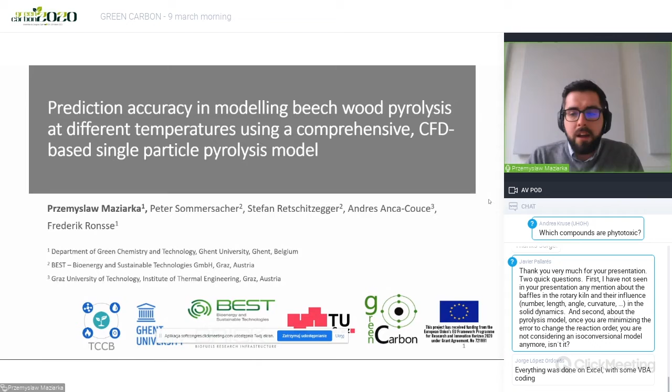The topic of my presentation is prediction accuracy in modeling beechwood pyrolysis at different temperatures using a comprehensive CFD-based single particle pyrolysis model. It's quite a lengthy title. So yeah, let's go to the details of it.

First, maybe I will highlight my role in the GreenCarbon project. My role in the project was development of a comprehensive pyrolysis carbonization model to predict the properties of co-produced biomass-derived carbon and bio-oil, where it's located within the GreenCarbon project framework, just in the middle, in optimizing process conditions to produce tailor-made biochars and linking biochars with the feedstock properties.

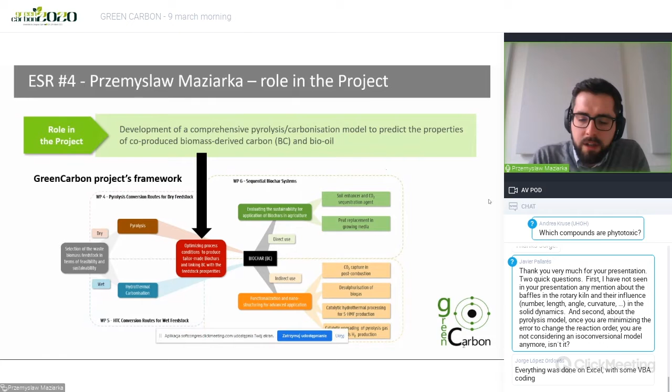Let's go back to the subject of the presentation. We all know that biochars can be applied in a variety of novel solutions, like in agriculture, chemistry, electronics, in batteries, supercapacitors. There is some research on those applications, but the question is why we don't use biochar on a large scale in those applications yet. It seems relatively simple to produce. We start from the biomass, we pyrolyze it at a certain temperature, and we obtain the biochar.

Yes, but the problem here is that those biochars do not have tailor-made properties, so they are not made specifically for each application. The properties of the biochar are sometimes completely random. That hinders their application on a larger scale in those novel applications. Where are the problems located with the production? The first is the inhomogeneity of the initial factors, so inhomogeneity of the biomass. The biomass has strong deviation in its properties, and also we don't know all about the process that happens during the production.

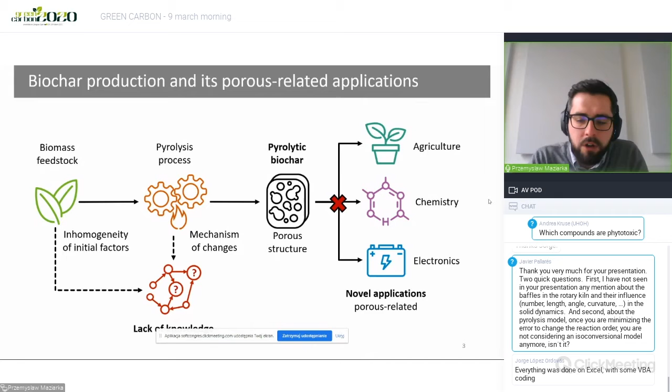From the chemical point of view, so in the reaction kinetics, maybe we know a lot, but in the case of the production of the material, there are some other properties that need to be taken into account as well. And changes, especially changes in the porous structure, are not known yet. So we have some lack of knowledge, which really hinders us from production of tailor-made biochars.

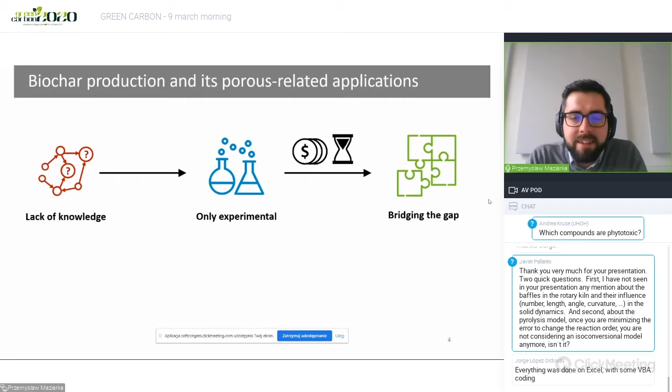Since we have a lack of knowledge, the very intuitive way is to conduct the research and bridge the gap. But the problem here can be that this only experimental way can be quite expensive. It requires a lot of manpower and it's time consuming. But there is also an option to couple the experimental work with the modeling work in order, in theory, to reduce the time and reduce the cost to bridge the gap. And coupling the experimental and modeling work is more or less the subject of this presentation.

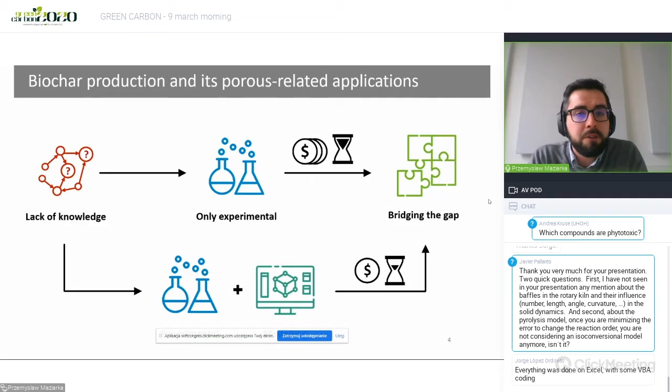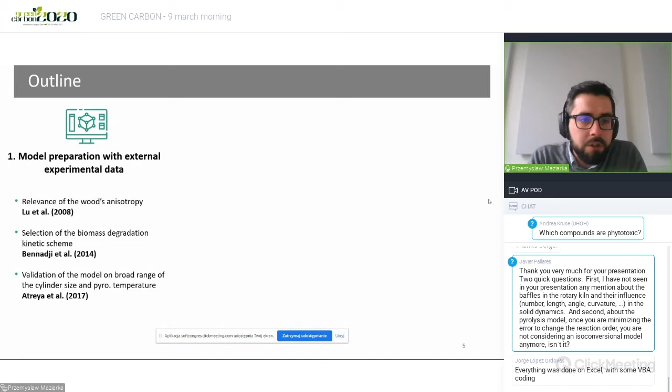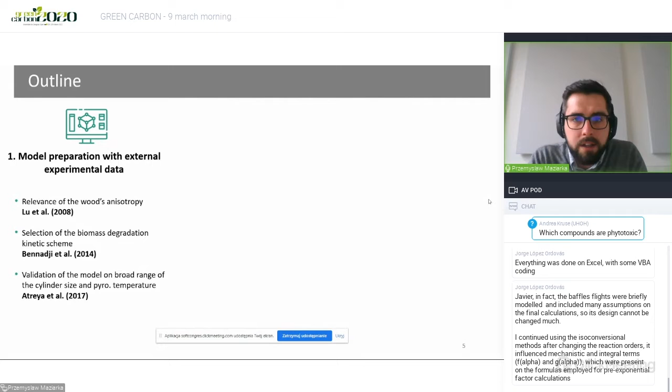So I will start maybe from the explanation of how the model was developed, so the model preparation with external data. First, I will say a few words about the influence of the wood anisotropy. Then a few words on the selection of the most appropriate kinetic scheme of biomass degradation, and then the validation of the model against a broad range of parameters, the particle size and the pyrolysis temperature.

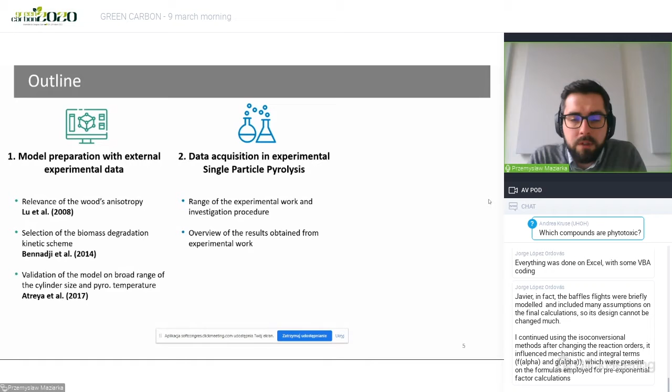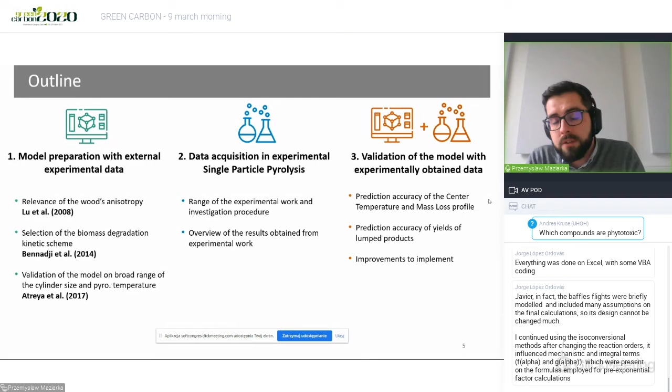Then I will focus a bit on the experimental work that was conducted, so the single particle pyrolysis of wood cylinders. Here I will explain the range of the research that was conducted, and we're going to briefly go through an overview of the results. And the third most important part, the validation of the previously established model with experimentally obtained data. Here we're going to check the prediction accuracy of the center temperature, the mass loss profile and the yields. And based on that, some further improvements will be indicated.

So let's start from the model preparation with the external experimental data. In brief, the CFD model is a numerically based model, so it's built only on mathematical equations. The most important ones are the governing equations, which drive the physics of the whole process. Also, the auxiliary equations need to be implemented, so the equations that have some experimental or theoretical foundations, and also the boundary conditions need to be well established, because they are the drivers of the changes in the process.

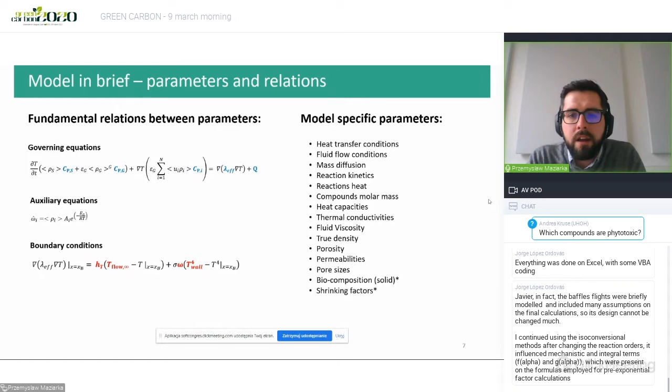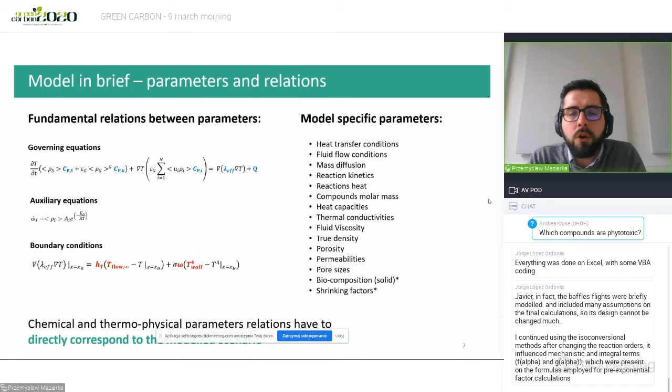Each specific model has to have very detailedly implemented parameters. There are plenty of different parameters that need to be implemented in the model prior to the simulation. And the most important thing here is that chemical and thermophysical parameter relations have to directly correspond to the modeled scenario. So for each simulation, for each model, parameters have to be very detailedly checked to see if they correspond to the situation that is to be simulated.

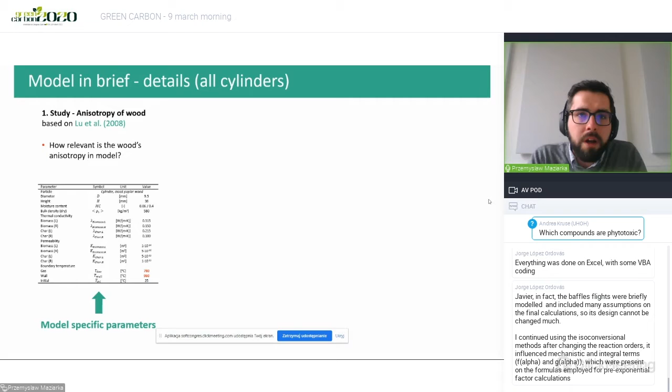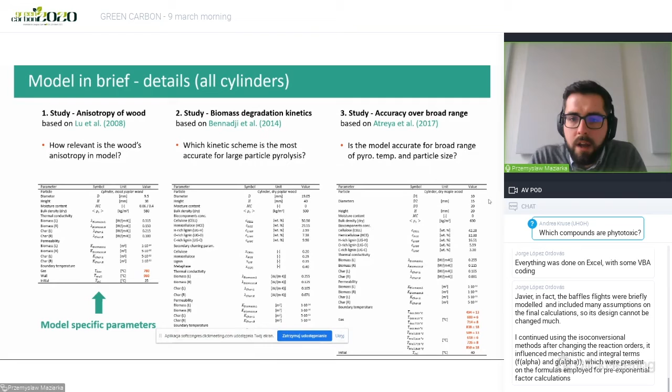Okay, so the first study was focused on how relevant the wood anisotropy is in the model. These are the specific parameters that have been used. In general, all the numerical investigation was made on the principle that the model changed only in one part, just to compare how that part influences the outcome of different scenarios. The second study was the investigation of the kinetics, so which kinetic scheme is the most accurate one for large particle pyrolysis, and the third one was the validation over the broad range of the parameters. As you can see, the number of parameters increases with each step.

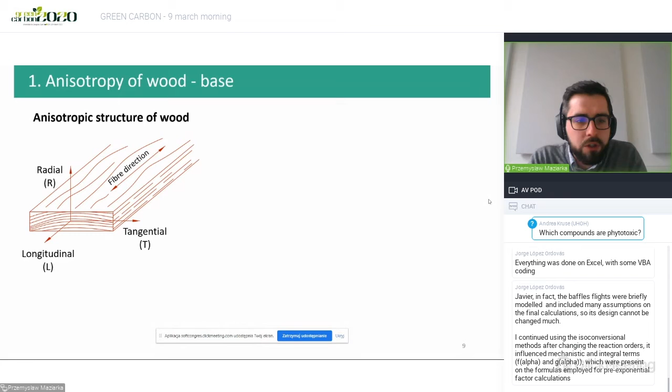So let's start from the wood anisotropy. As we all know, wood has different properties in different directions. There are three different directions in the wood structure: radial, tangential, and longitudinal. This is related to the fiber direction of the wood and also to the lumens. The two parameters that are the most dependent on the direction are thermal conductivity and permeability. Experimental data indicates that in the longitudinal direction, those parameters have totally different values than in the radial and tangential, but between those two directions, radial and tangential, there is not a lot of difference.

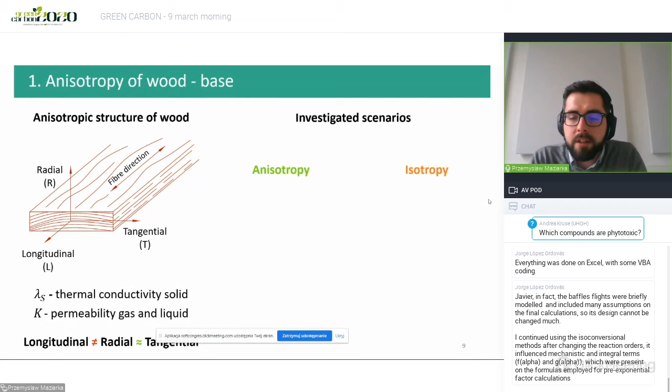That really indicates that the model can be reduced from 3D to 2D because only two dimensions are really different from each other. This study had to prove that 2D is really the lowest number of dimensions that can be used. So there were two investigated scenarios, anisotropic and isotropic. In the anisotropic model, thermal conductivity and permeability were different in the longitudinal and radial directions. And in the isotropic model, those parameters were averaged and were the same for each direction. If the isotropic model were as accurate as the anisotropic model, then we would not really need to implement 2D models and could focus only on one-dimensional models. But the question is, is it really true?

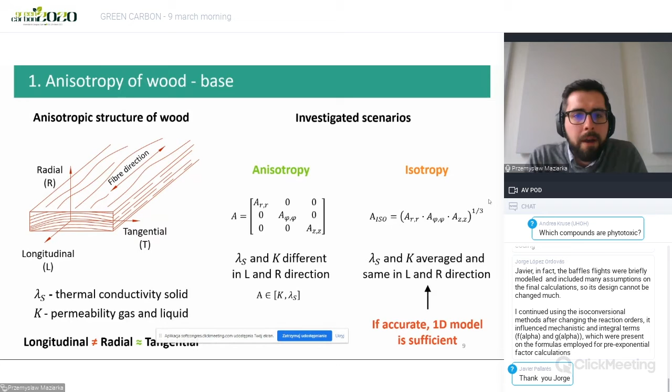So the first comparison of the temperature profiles and the mass loss profiles indicates that averaging the thermal conductivity values leads to a strong overprediction of the temperature of the center and also overprediction of the conversion speeds. So the isotropic model is not really accurate in comparison to the anisotropic model. That means that the directional dependence of thermal conductivity is very relevant for the model. The other thing is there was an investigation on the intrinsic gas velocity distribution. And as can be seen on the right-hand side, if the model has isotropic properties, the gas takes the shortest route to escape the particle.

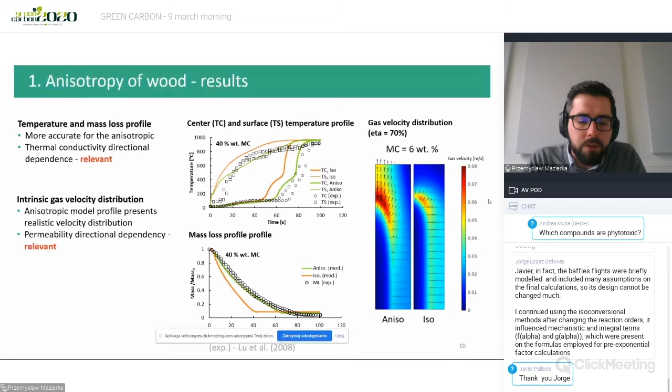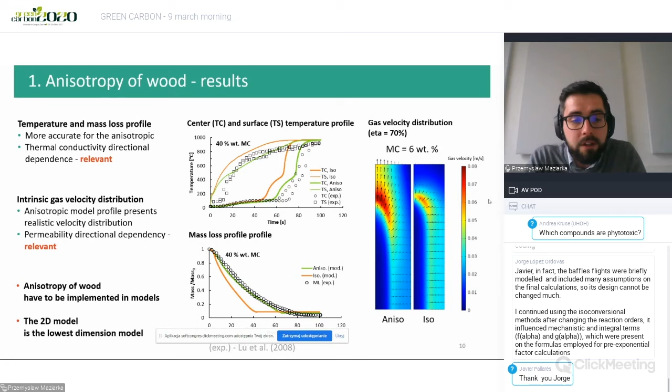In that case, the radial direction, which is not really a realistic distribution, because in the radial direction permeability is much lower. So most of the gases escape through the longitudinal path, and this doesn't have much influence on the thermal behavior of the particle, but it has a very strong relation to the secondary reactions that can occur within the particle, because it's very relevant for the residence times of the vapors within the particle. So long story short, anisotropy has to be implemented in the models, and two dimensions are the lowest number of dimensions that need to be implemented.

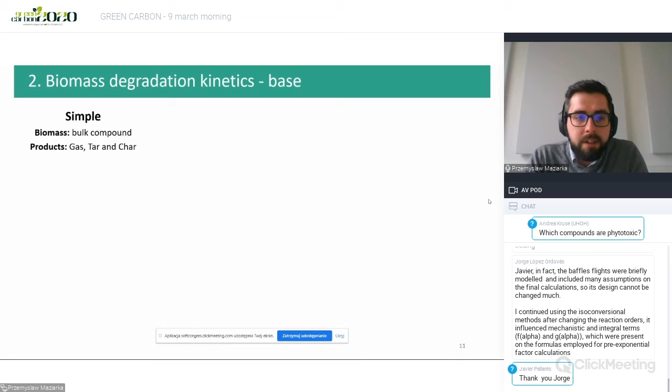Let's go to the investigation of the different kinetics. We start from the very simple kinetics, where the biomass is implemented as a bulk compound. There are 3 products. This is the Shafizadeh and Chin's reaction scheme, 3 reactions, 4 compounds, very simple. We also checked the different degradation kinetics, the most detailed one, in which biomass is in the form of a component mix. And there are numerous products, volatile products, and char, which is modeled as pure carbon, and metaphase traps, whose degradation mimics the devolatilization of the carbon during the process.

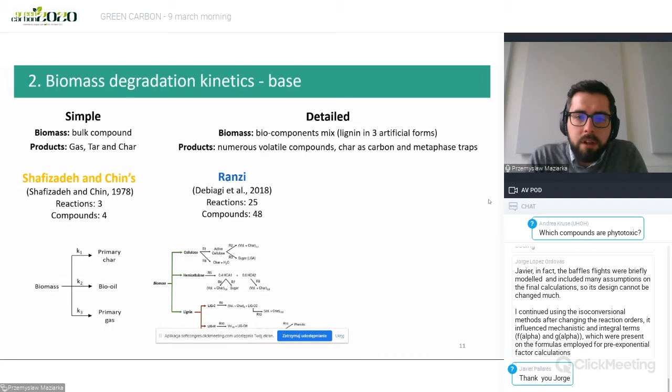We selected here 2 models, Ranzi, and Ranzi Anca-Couce, if I pronounce it right, the RAC model. The first model was developed mostly to predict fast pyrolysis, and the second is an adjustment of the Ranzi model through 4 parameters of secondary charring, so the model should be more accurate in predicting thermal conversions other than fast pyrolysis.

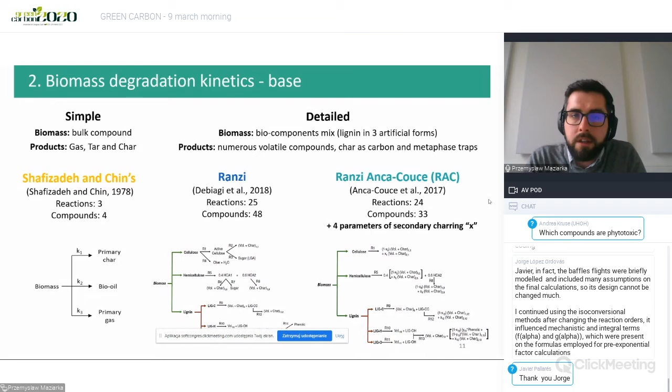1 minute left. 5 minutes? Okay.

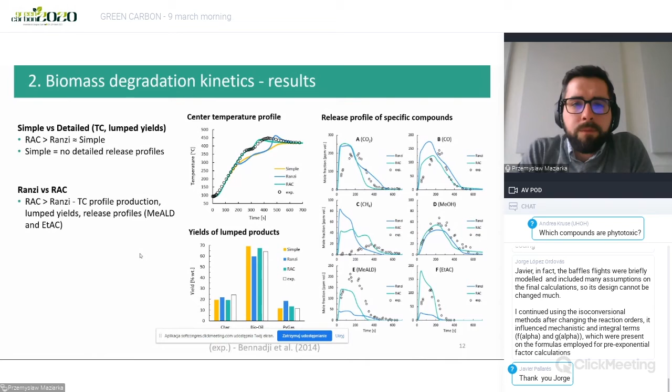Okay. In general, this investigation leads to the point that the RAC model should be implemented because it's the most accurate one.

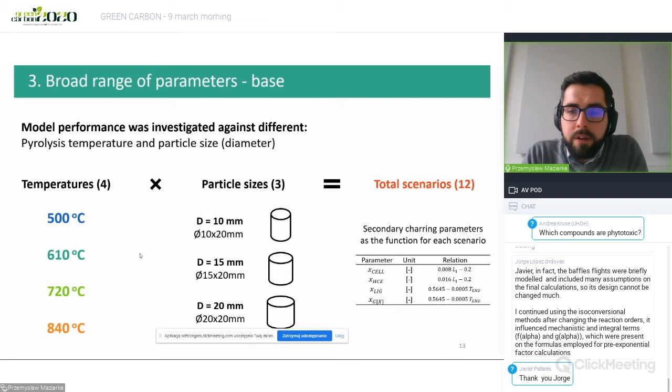Then the model was prepared on a broad range of the parameters, so 4 temperatures and 3 particle sizes, in total 12 different scenarios. And due to that, the scenarios really changed. The secondary charring parameters were implemented as functions, depending on each scenario.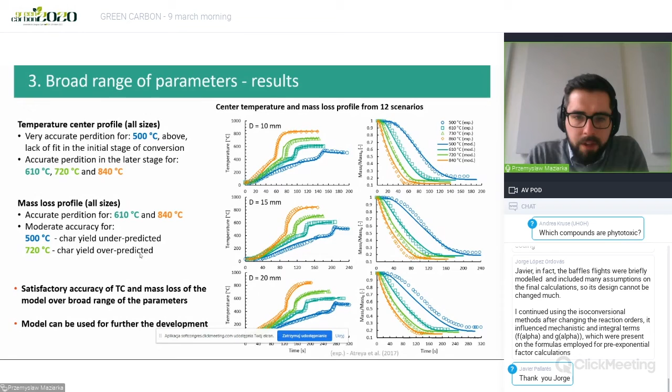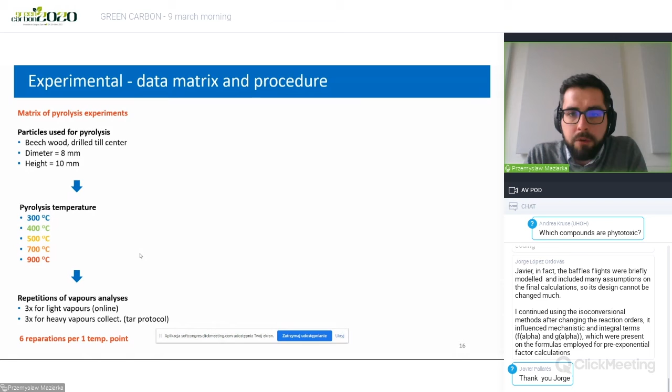Okay, so let's go to the experimental part. In that part, single particle pyrolysis was conducted at 5 different temperatures. Each experimental point was measured 6 times, 3 times with the assessment of the release of the compounds online, and 3 times more to collect the heavy vapors. This is more or less how the scheme of the reactor looks.

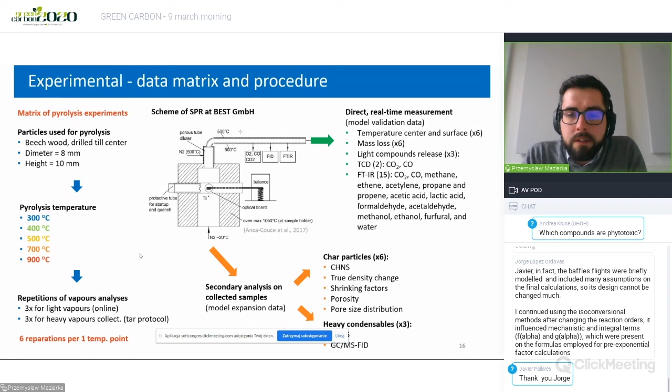In the reactor, we can measure in real time the center and surface temperature, mass loss, and release of the compounds with 2 different detectors: in the TCD, carbon dioxide and carbon monoxide, and in the FTIR, those 2 and 13 more of the light compounds. For the secondary analysis, samples were collected to make some additional measurements beyond the direct real-time one. So the char samples and heavy condensables were collected as well during the experimental work.

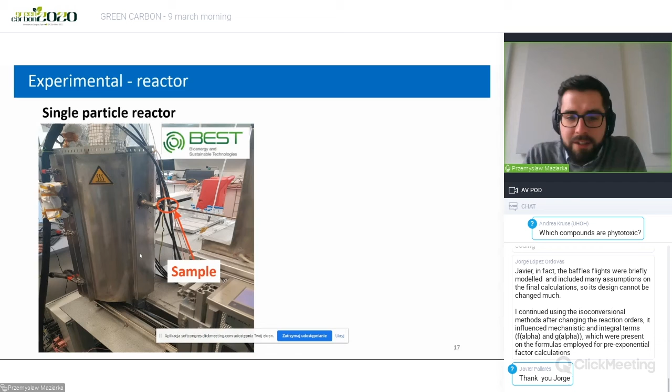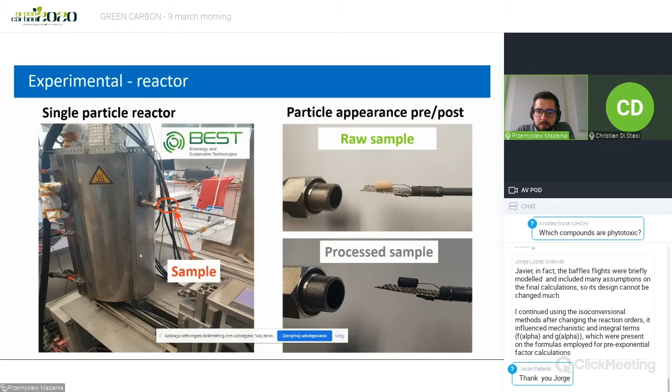Przemy, we are at 50 minutes now, so go directly to the conclusions, please.

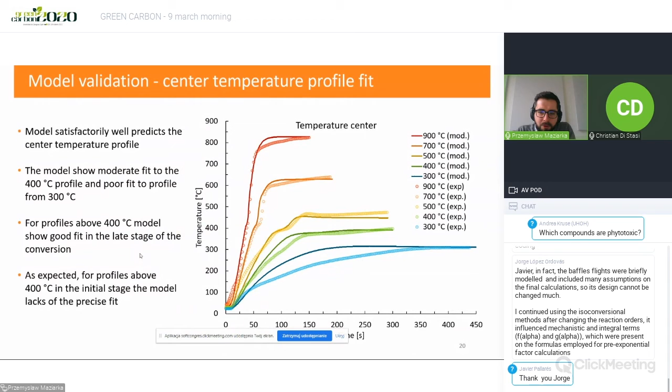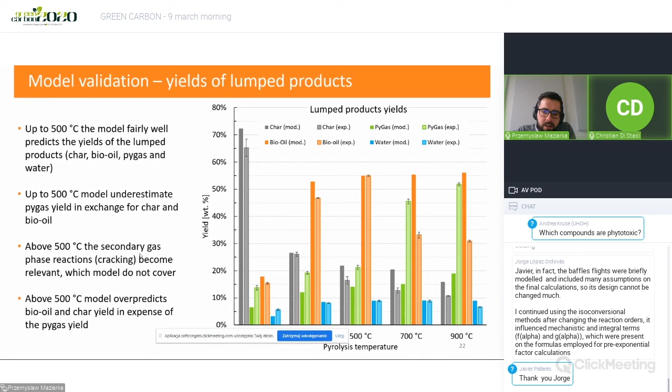Directly to the conclusions. Okay, so the models fit the experimental data, but maybe not at 300 degrees. And the mass loss is not that accurate, it needs to be adjusted. In terms of the yields, when the secondary gas phase reactions occur, the model loses its precision in the yields prediction.

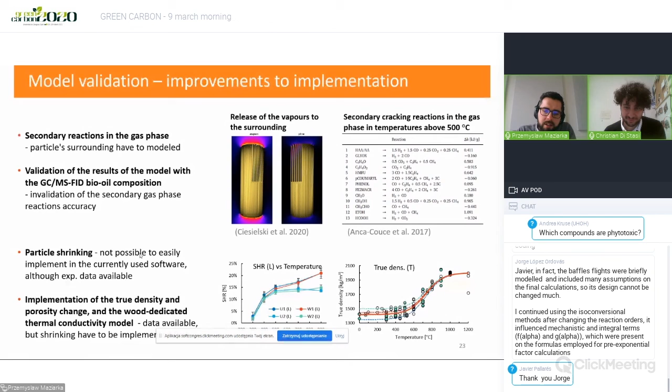So that means that secondary reactions need to be implemented, but for this, not only the particle but also the surroundings have to be modeled, and to be more precise, the temperature distribution and shrinking have to be implemented. Currently in the software that is used, it's not very straightforward how to do that, but the experimental data on those is already available.

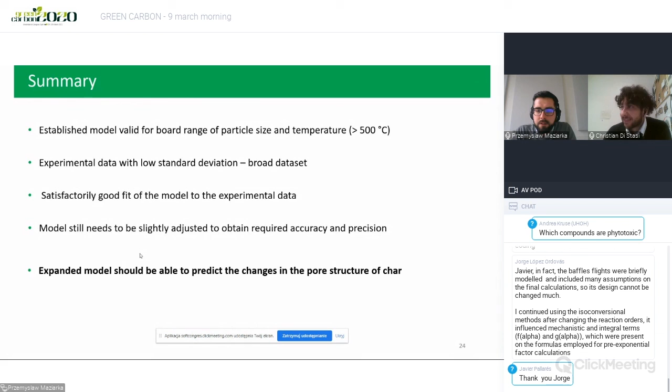So to sum it up, the established model was valid for a broad range of the parameters. The experimental data set was broad, and there wasn't really a strong deviation in the experimental results. Currently, the model shows a satisfactory fit to the experimental data, but it still needs to be slightly adjusted to obtain the required accuracy. And the most important thing is that it has to be expanded to predict the pore size distribution, the porous structure of the biochars.

These are the publications that are relevant to the subject. And thank you for your attention. Thank you, Przemy. Okay. Sorry, as I mentioned at the beginning, it was extremely on the surface. There are plenty of things I could focus on, but I would rather give an overview of the scope than focus on some details.

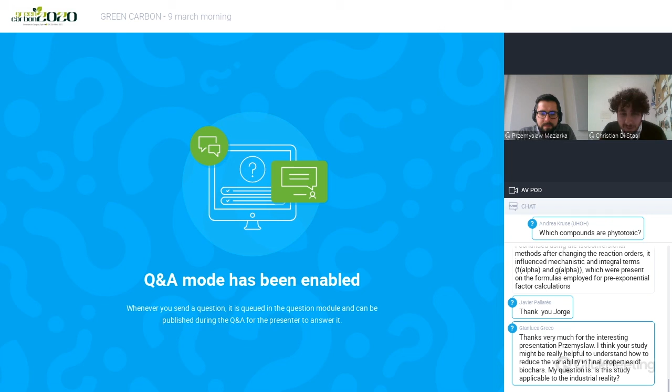Thank you, Przemy. We have time for one question. Gianluca, can you see it? Yes. I see. Can you see the question, Przemy? No, I don't really see it. I'm not really sure how I should minimize it.

Thanks very much for the interesting presentation. I think your study might be really helpful to understand how to reduce the variability in final properties of biochars. My question is: is this study applicable to the industrial reality? Yes and no.

The problem here is to first establish the conversion of the particle in a very detailed manner, just to assess how the particle changes, how the properties change. And then when that is established in detail, the model can be simplified. So we can decouple the governing equations from the outcome and have some simple mathematical correlations that can be further transmitted to the higher level of modeling.

In general, this kind of research gives base information about the changes. So based on this numerical research, experimental work can be driven in different directions, which can also be connected with the industrial approach.